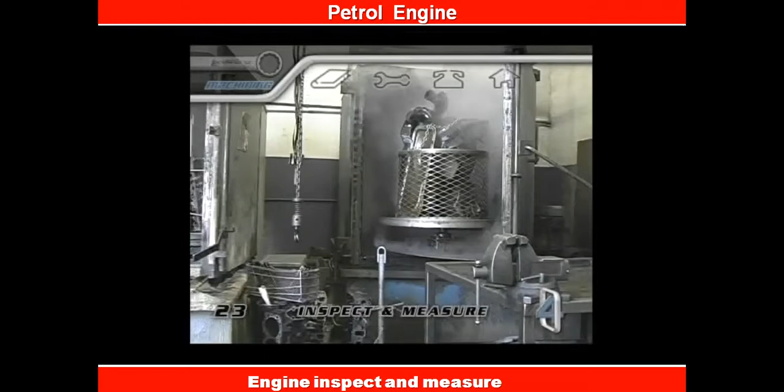Every part will be visually inspected for cracks or damage. After a visual once-over, the block and heads need to be checked for hard-to-see hairline fractures or cracks. Any parts made of cast iron can be magnafluxed.

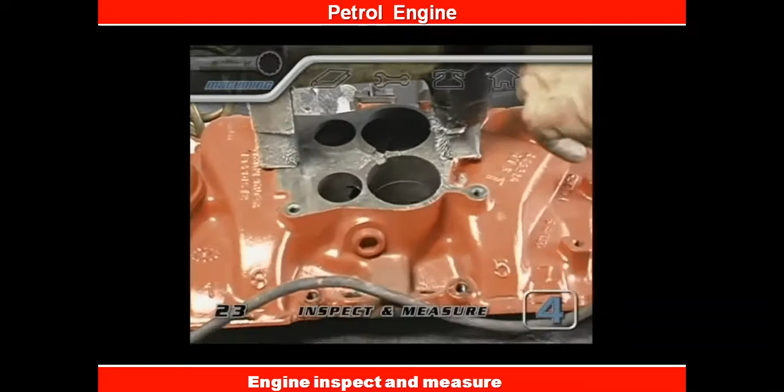For this process, an electromagnet is stuck on the part and then it's sprayed with a special powder that will stick to any cracks and make them very visible. Magnaflux doesn't work on aluminum parts. They need to go through a dye process to make cracks visible.

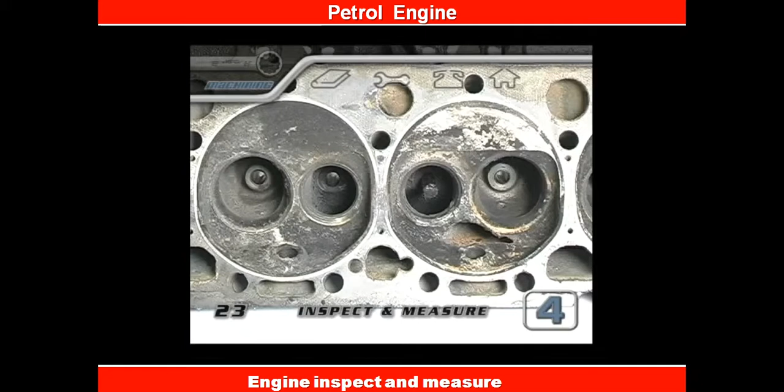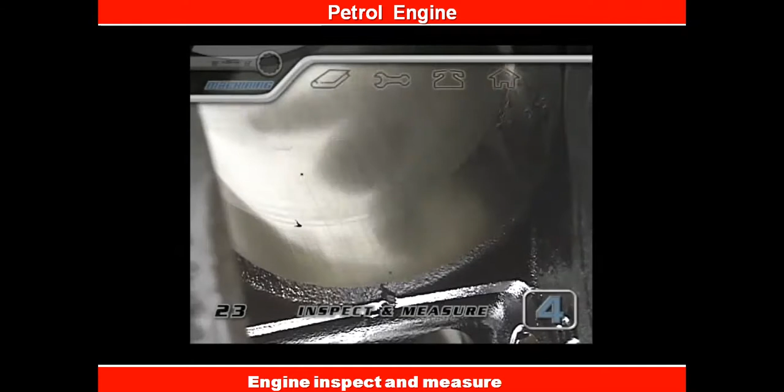Once the machine shop knows if the parts are still good and not cracked, they can measure the tolerances to see what machining is going to be necessary. If the visual inspection showed obvious scratches or damage to the cylinder walls in the block, then the pistons would be considered junk and the block would need to be bored out.

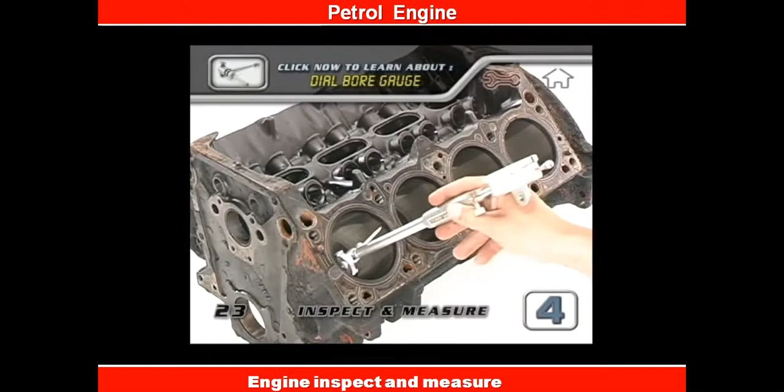If the visual and the magnaflux of the block was okay, a dial bore gauge would be used to check the cylinders to see if they were out of round or if there was a taper from the bottom to the top of the cylinder. The dial bore gauge will tell the machinist if the cylinder has to be bored to straighten it out, or if a hone is going to be all that's needed to clean up the cylinder walls.

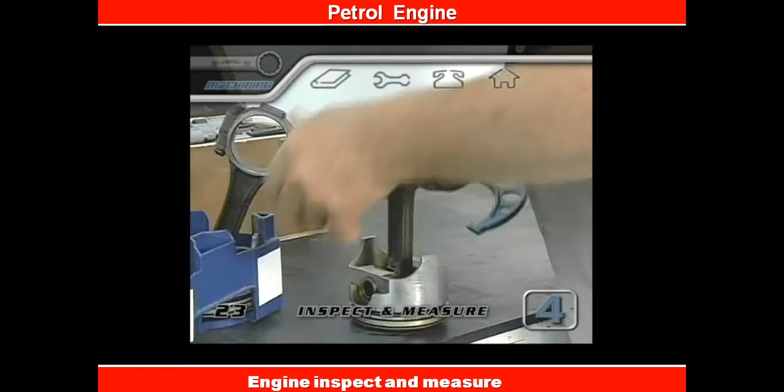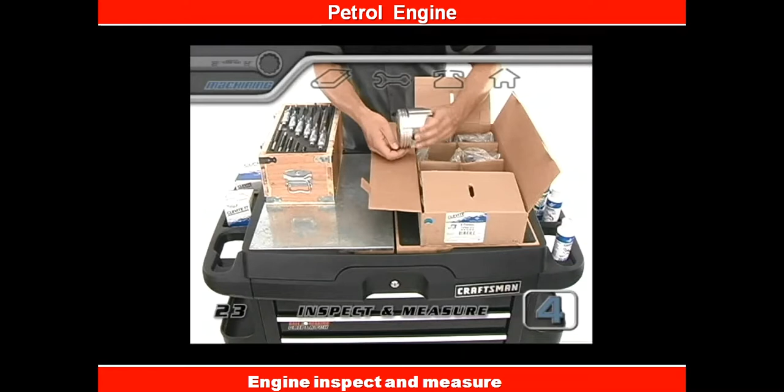In either case, the pistons have to be measured. If it's a bore and hone job, new pistons are going to have to be used. The new pistons don't have to be on hand for the boring process, but they do have to be physically measured to determine the size of the final hone. Piston size is a constant and cannot be machined.

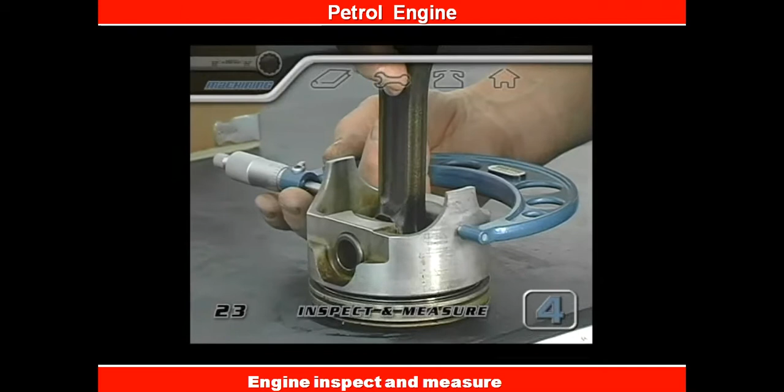With the piston inverted, the skirt is measured here just above the pin bore. This will determine if a used piston can be reinstalled in a block with just a hone job. In the case of a new set of pistons, the diameter found with the micrometer will tell the machinist what dimension to hone the block to. This way the pistons will have the proper clearance in the cylinders.

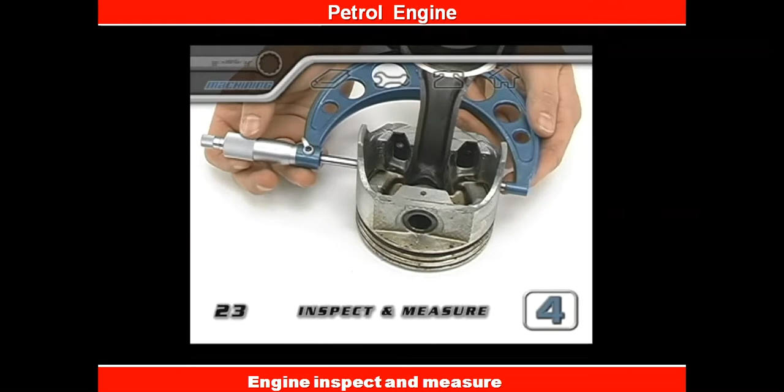If a piston is measured and found to be worn too far, it is considered a collapsed piston and cannot be reused. Both cast iron and aluminum heads will get a close visual inspection. Some machine shops even have a vacuum fixture that can test how well the valve seats are sealing.

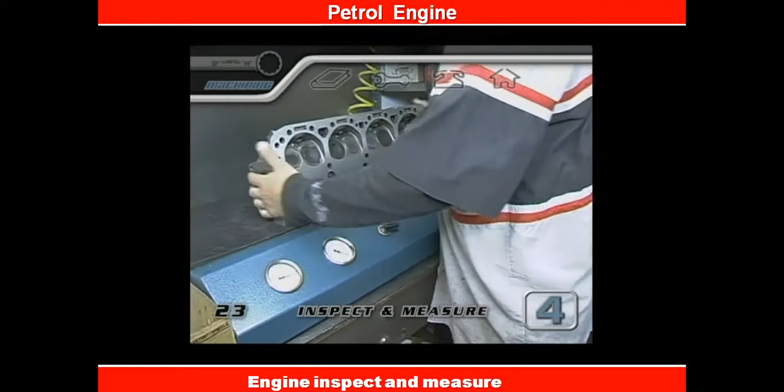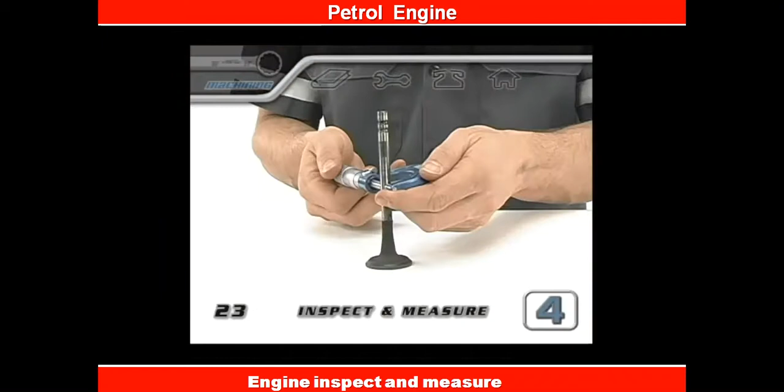The valve guide, which is the hole in the head where the valve slides, is checked for excessive play, and if wear is found, the valve stem might be checked with a micrometer to make sure the valve can be reused. For the valve train, the camshaft and lifters should be examined.

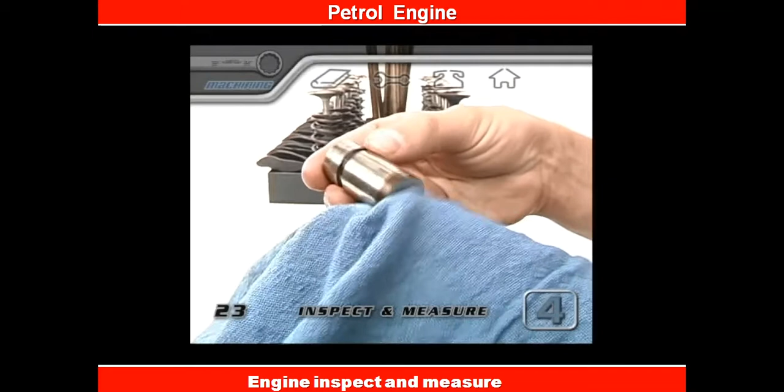Any signs of wear will indicate that all the lifters and the cam will need to be replaced. As we said before, it's pretty much a standard procedure to replace the cam and lifters for almost every rebuild. The valves and springs will get inspected a little bit later on.

Any push rods that don't roll smoothly on a piece of glass should be replaced, as well as any keepers, retainers, or rocker arms that have signs of damage. Remember to keep everything in order if you're planning on reusing the same parts.

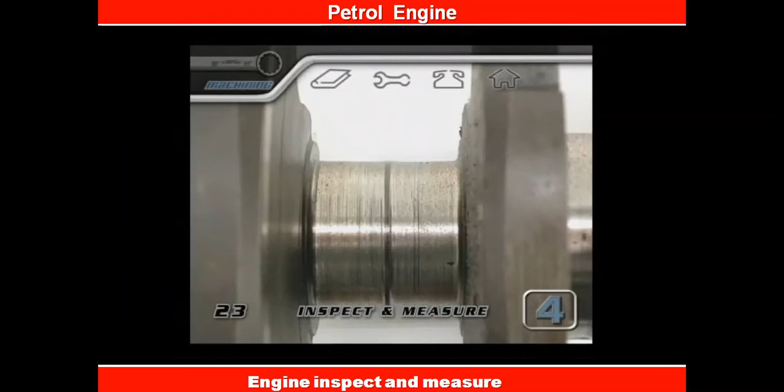Back to the short block, the crankshaft is also inspected and measured. If there are serious scratches or gouges in any of the journals, they will need to be ground undersized, and undersized bearings will be used later when we reassemble.

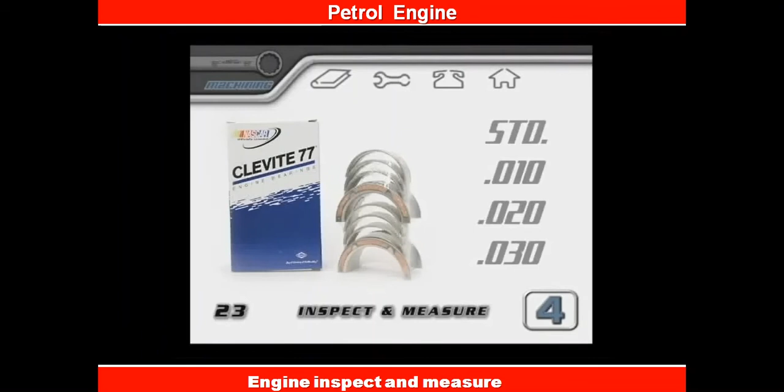Bearing manufacturers usually limit available sizes to standard 10, 20, and 30 thousandths of an inch undersized for cranks that have to be cut. This crank was cut 10 thousandths under on the main journal and 20 on the rod journals. Now it's getting the final polish to make the journals as smooth as glass.

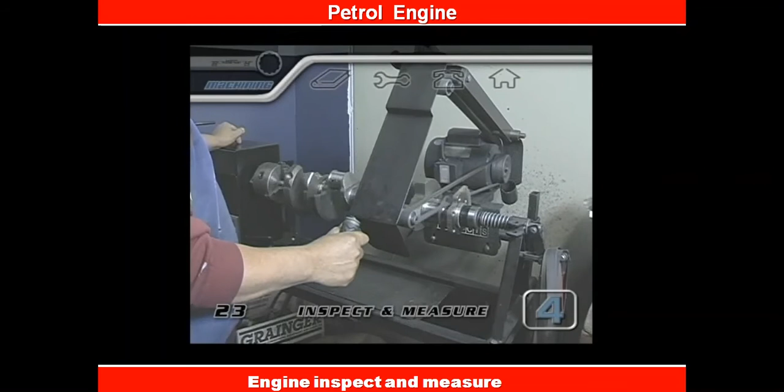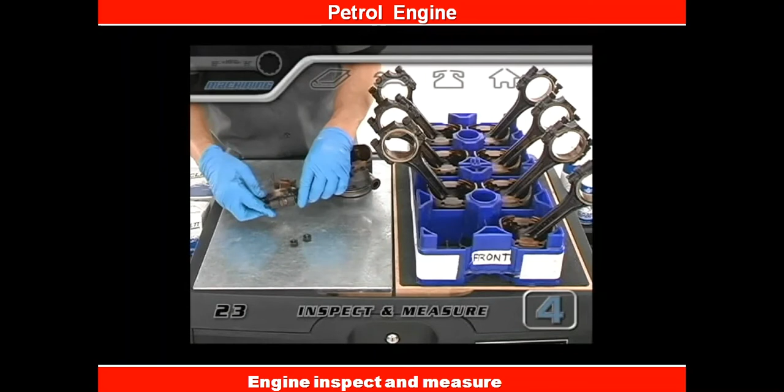Sometimes the final polish is all that's necessary to return an old crankshaft to a usable status. The big and small ends of the connecting rods will be inspected too, and the rod bodies will be checked to make sure they're not bent or twisted. After all the inspections and measurements, your machine shop...